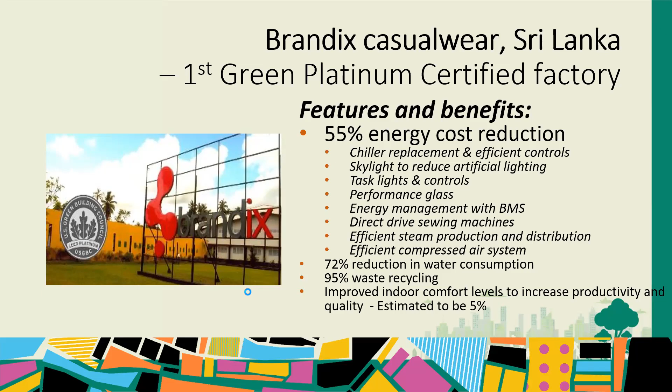If you show the next slide picture, this is, as I told you, Hatton National Bank, HSBC, Standard Chartered, all those commercial banks. Bank of Ceylon is doing a lot of work with the Sri Lankan Green Building Council, and they intend to move many branches, almost all the branches, to get some sort of certification in time to come. This is Hatton National Bank, Nittambuwa.

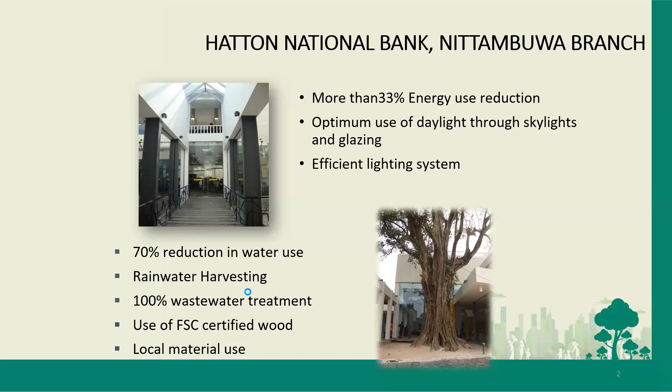Again, these are measured facts. How do we do that? Next slide please, Upeksha. Now this is also a unique project, the first expressway service station to be certified as green.

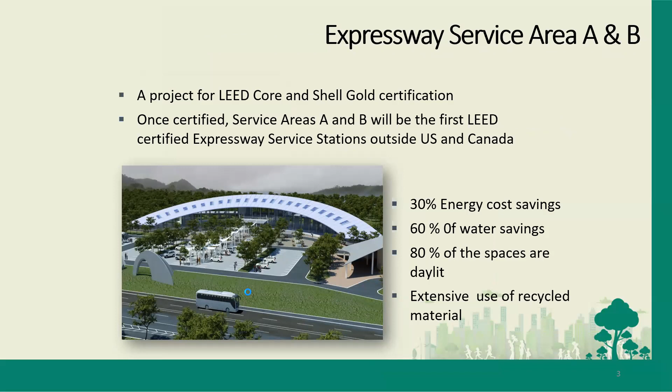So on the Southern Expressway, two service stations are also certified green. That was also sometime in, I think, 2004. These are very, very old projects. You can see the statistics there.

Next one, now this is what is called HSBC Bank Two Union Square. Again, it's both GBCSL certified and US Green Building Council LEED certified. So you can see the figures. The important thing is the 42% energy saving and 50% water saving, a tremendous improvement when you compare it with a normal building.

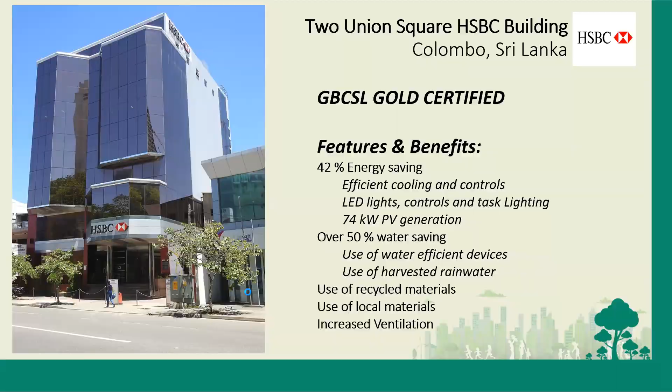Next one, Upeksha? Yeah, I think those are the four things. So I talked about the international scenario, I talked about what are the things. Now we talk about what are the other things I have to talk about on this subject. Yes sir, please.

Yes, the hurdles, that is very important. We have been talking about this for a long time within the council, within the board meetings. Do you think our progress is satisfactory? As far as I'm concerned, no, it's not satisfactory. I think the basic issue is here: when you go the way we sell a product to a client, a developer, you will ask a client, okay, you are building a building, why not make it a green building and get a certification? So the first question he will ask is, how much is it going to cost me?

So he said, okay, obviously the green building construction cost will be more. Now, if you ask me how much more from a base building, there are different levels. You could say silver is about 2% incremental cost in the construction. Gold is about 10% increment. Of course, platinum is expensive, about 30% increment. So immediately when you give the figure to a developer,

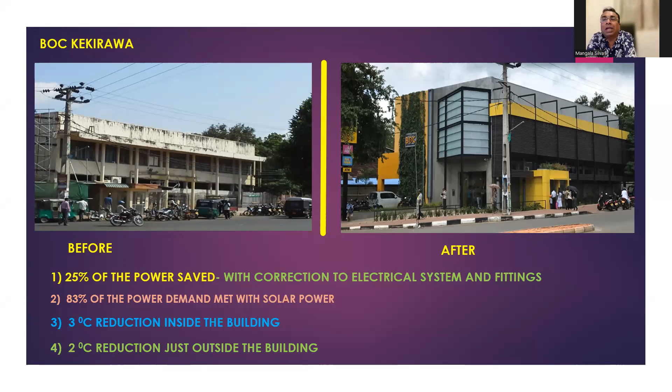This is again another technique we have used to reduce the inside temperature. You can see these green walls and some green grass patches. Also, you can see the internal pictures of this building, which is currently running with, most of the time, daylight and natural light. I hope that's about the Bank of Ceylon.

This next one is the first green building project for a school in Sri Lanka, at Holy Family Convent, Kalutara. In this project, 150% of the power demand was met with solar power. You might think, what is 150%? Basically, once you install this solar panel system, we observed that we can give power to some other buildings as well, and there's a significant reduction in their power bill.

We also observed a 2 degree centigrade reduction inside the building compared to the other school buildings. In this particular school, there are so many other building blocks, and we observed 2 centigrade reduction inside this building compared to the others.

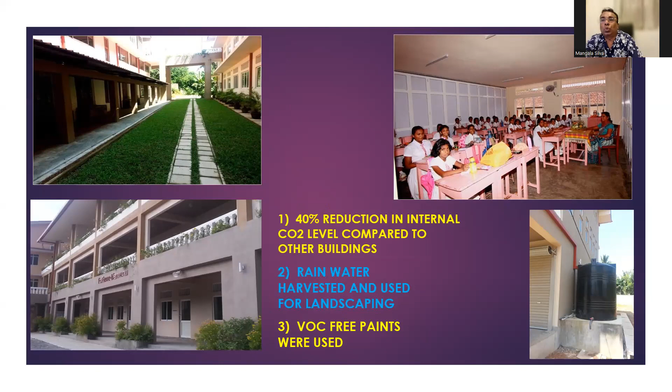Is there any other covering material? The solar panels are used as the covering material, as a method to develop solar energy.

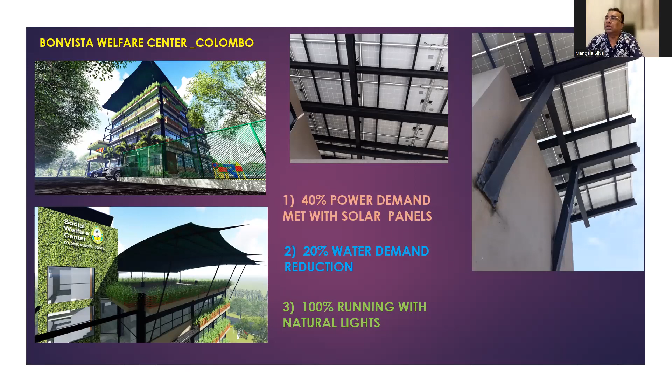So that's the stories, I would say successful. So yeah, can you share?

If I talk about lessons learned, first one I would say if a green associate professional or accredited professional can clearly convey the importance of going green, definitely clients will go for green. That is my experience.

Then the second one, definitely clients will be happy when the buildings are functioning. Sometimes at the very beginning they might think we did some extra capital investment, but after 1 or 2 months they are really happy when they are experiencing lower utility bills compared to other buildings. Also, with my experience, if there are clients willing to construct a lot of buildings, if you can convince them to go for their first building as a green building, definitely they will adopt it for the second and third building, and so on.

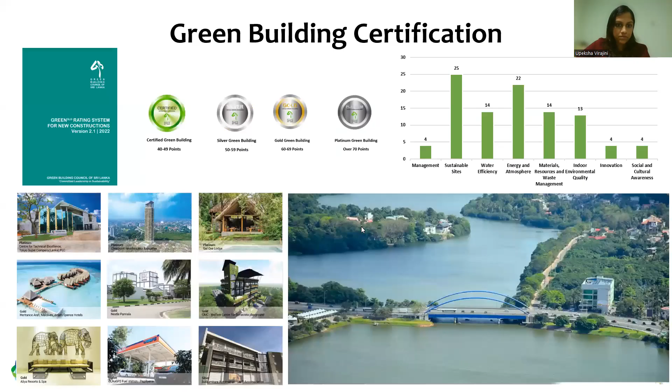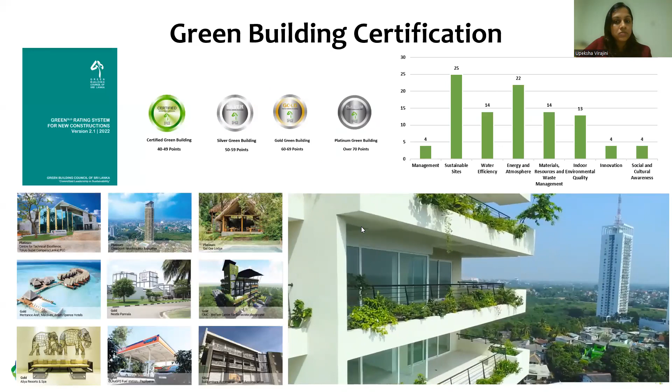So this one, you can see - sorry. There are 4 certification levels, covering 8 categories: management, sustainable sites, water efficiency, energy and atmosphere, materials, resources and waste management, indoor environmental quality, innovation, and social aspect.

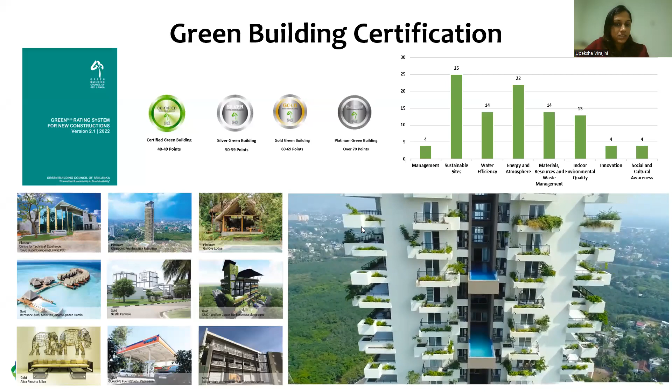So these are a few examples of rated buildings. In the video, you can see Clear Point Residences Rajagiriya. I think this is the highest rated building right now. And we certify building products as well through our own rating systems.

Talking about the other environmental programs, we conduct beach cleanups, green walks, tree planting programs, and art competitions for students, undergraduates, and everyone - we are conducting different events from time to time. And for research and development activities, we are doing a lot of research relevant to sustainability.

As well as there's another network, the alumni of certified green professionals. Those who engage with Green Building Council after completing the associate professional training program can join the alumni network as well.